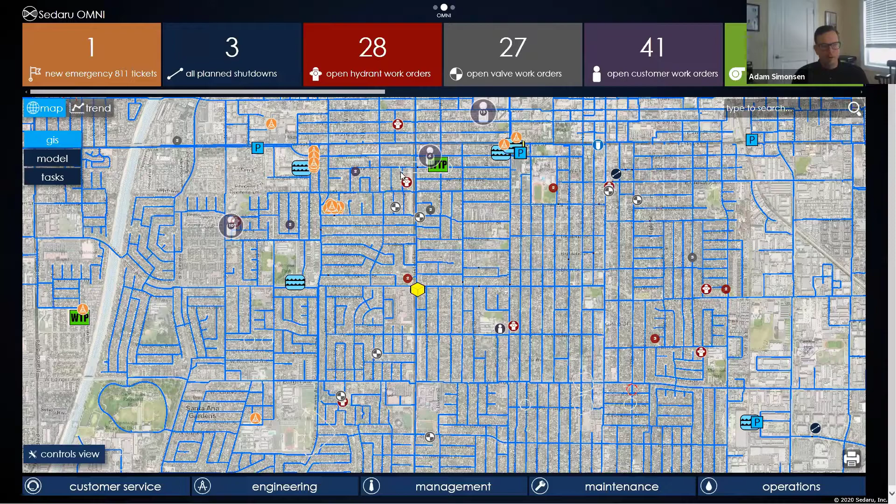If I want to access my water model, I'm just going to swipe over, really, right? And that's now going to put me in a screen with a slightly different interface that you see up here. So those KPIs that we're seeing across the top get replaced by buttons that really help walk you through the hydraulic model.

And here's really the key with what we're doing with Sedaru modeling: we want to make it so that anybody at the water utility can use the hydraulic model to get information out of it. It shouldn't be limited to that one engineer that really knows all the information, or that consultant that knows things. And those folks are going to add a tremendous amount of value in how you use the model and set it up.

But the idea is how can that average person, how can a field user, how can management, how can the average person at the utility dive in and use the model? So quickly, for folks that aren't super familiar with the hydraulic model, I want to kind of explain, well, what the heck is it? How does it differ from what you might be used to?

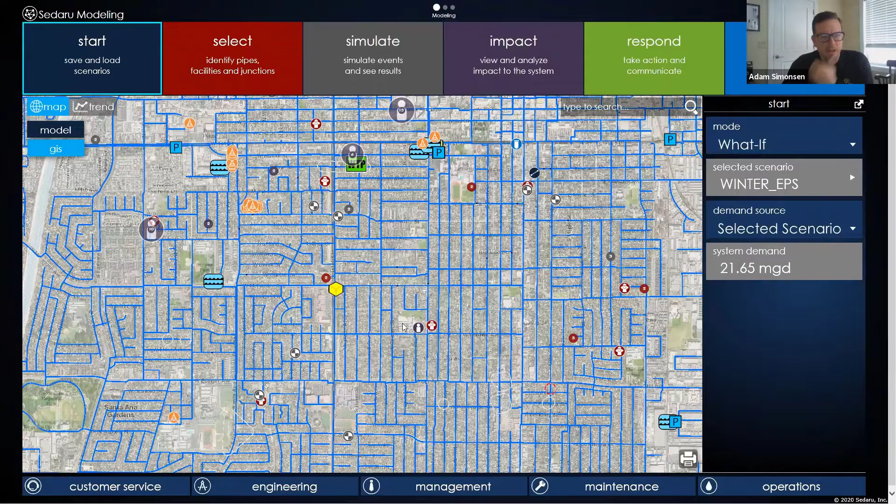So what you're looking at on screen here is the GIS, and I'm going to just zoom in a little bit here, and you're going to see this map update a little bit. And so when you look at your GIS, you've got a collection of pipes, and in this one, valves, and I see hydrants on here. All these M's are individual meter locations. And so you have all of this incredible amount of detail within your GIS, right?

And when we look at the hydraulic model, the model itself is really just another representation of some of these. So I'm going to use these buttons over here. I'm actually going to shut the GIS off, and I'm going to turn the model on. Okay, and so now you see something that looks a little bit different. And in many ways, the hydraulic model does simplify your view of your system.

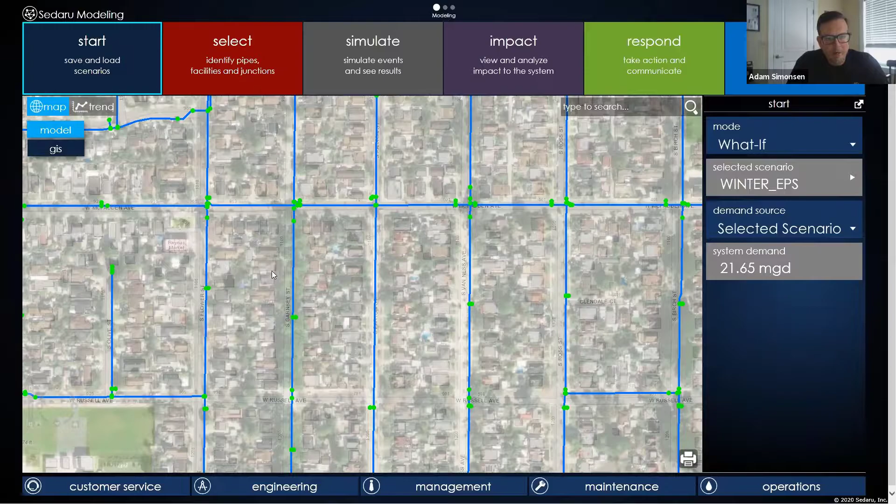So it's fundamentally going to be made up of a couple of different elements. I'm going to focus for the moment on pipes, right? Which everybody should be familiar with, obviously. And so I have a pipe that I've selected here. And you'll notice that that pipe corresponded exactly to a GIS pipe.

And that's really generally the trend with building hydraulic models these days, is that you're going to see a relationship between your pipes in your GIS and your pipes in your model. They should be pretty much one and the same. Some folks will have what's referred to as a skeletonized model. So maybe you're only looking at your transmission system, or you're just looking at large pipes in the system. And while hydraulically that can get you very similar results, the trend has certainly been to use what we call an all pipes model.

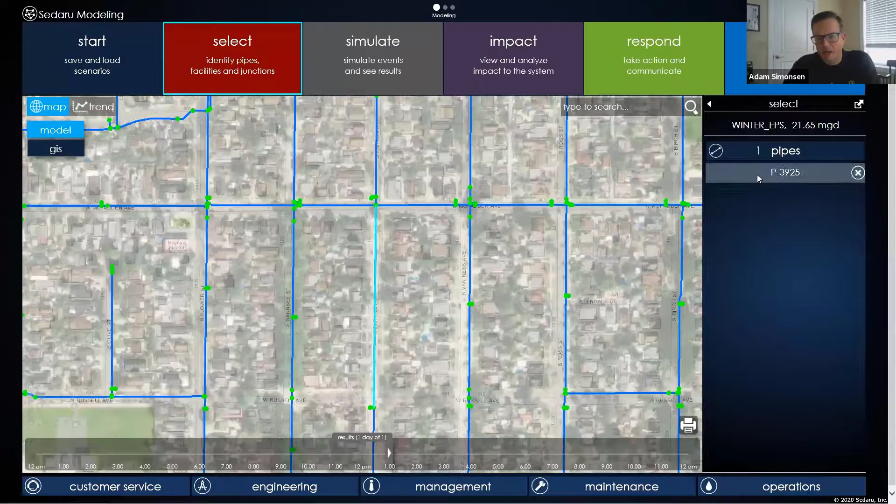So you're bringing all those things in. So I can see the pipe in here. I'll give you some information about it. There's some hydraulic information that we'll get into. There's a model ID. There's nodes, which I'll explain. There's a length. There's sort of all this basic information.

You'll also see this roughness value in here, which is a friction factor essentially that just gives you an idea of what the roughness of the pipe is, how much friction there's going to be of water flowing through that, right? So pipes that are relatively new have a much higher roughness factor. Pipes that are older or tuberculated, or that are going to have much more head loss going through it, generally

have lower roughness factors. Not something that you really need to get into, and when you're just using the model here, it's more of you're going to use it from a calibration perspective, but we're talking about how we're using it, so we're not going to dig into that. But I just want folks to be aware of that when they see those pieces.

And so when I use a hydraulic model, the data that I get out of pipes is I'm going to see these sort of factors as I see up top here: head loss. I'm going to see velocity, right? So 0.64 feet per second here. I'm going to see flow going through here as well, right? And so those are the result information I'm going to get out of pipes.

I'm looking at what's called an extended period simulation here, and so that means I'm looking at information over time. And so here I can see what the flow in this pipe looks like over time. So on a normal day, I can see at any point in time what I would expect for flow through here. You notice these values are negative, so it just indicates which way the water's flowing through the pipe there on a given day. And so I can see that information from pipes pretty easily.

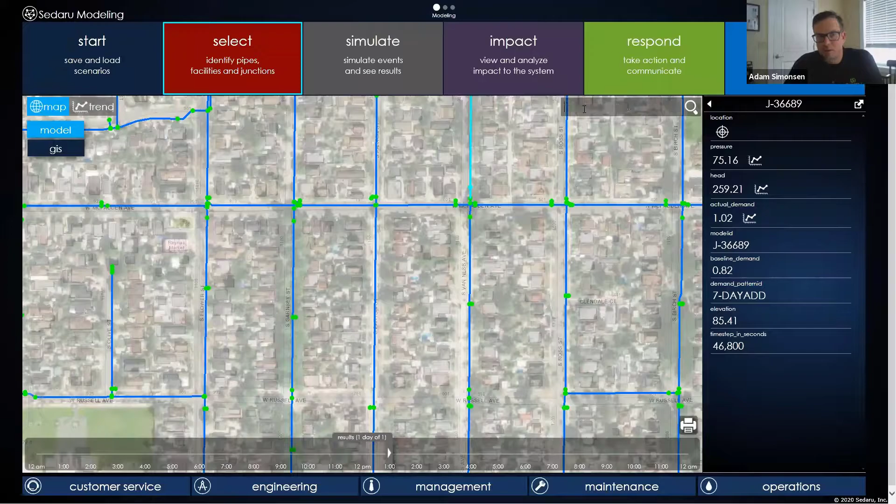typical. And then what you also have within your system is things like tanks and pumps and all of those pieces. I'll use the search feature in here. We'll just type in T, and it should spit back some search results, and that's going to let me see a listing of elements in here. So I'll see in this particular system, I've got 8 different tanks. I can click on one of those, see information about the tank. This little location button's nice because that's going to bring me right to the location of that particular tank.

And so you'll see, I can see that here on the map. And then you see here, I've got a pump station. In this case, there's a well that feeds directly into here as well, and I'll see that here. And so one of the places where you won't typically have exact one-to-one relationships in models is at the actual facility. Sometimes to keep life simpler for everybody, all the individual facility piping might or might not be there, but if it's not there, you're still making a good hydraulic representation of it. So that's the basics in the construction of a model.

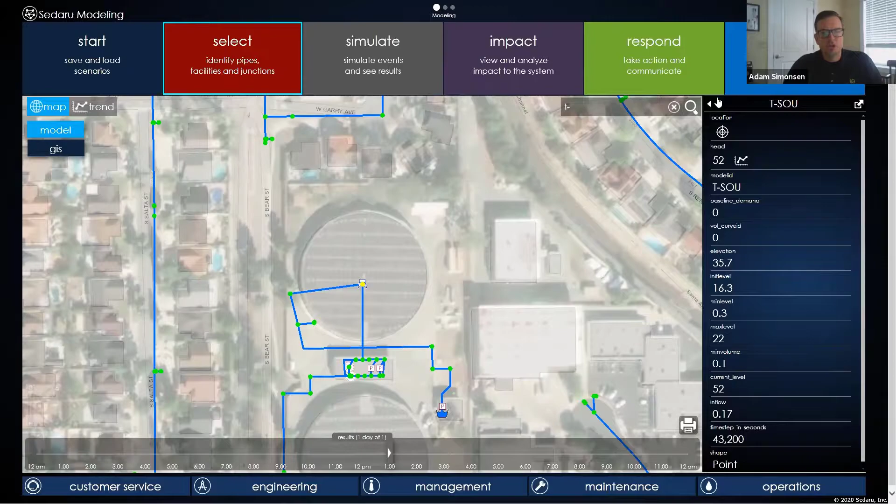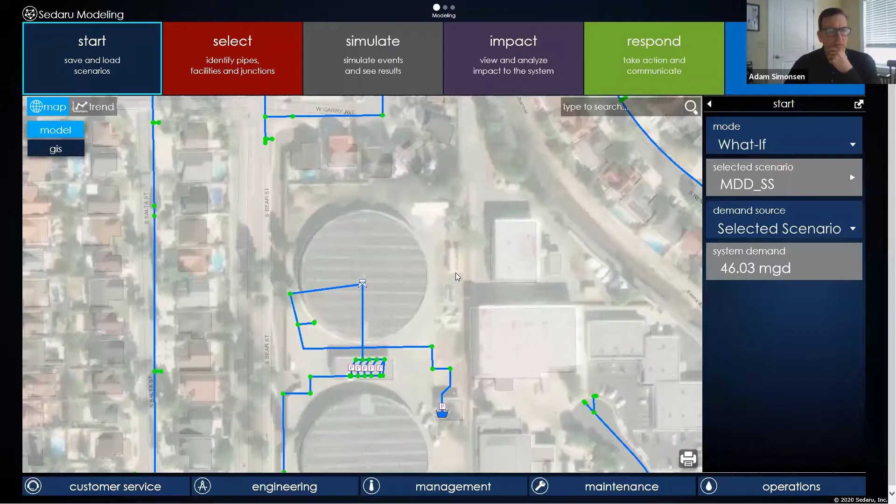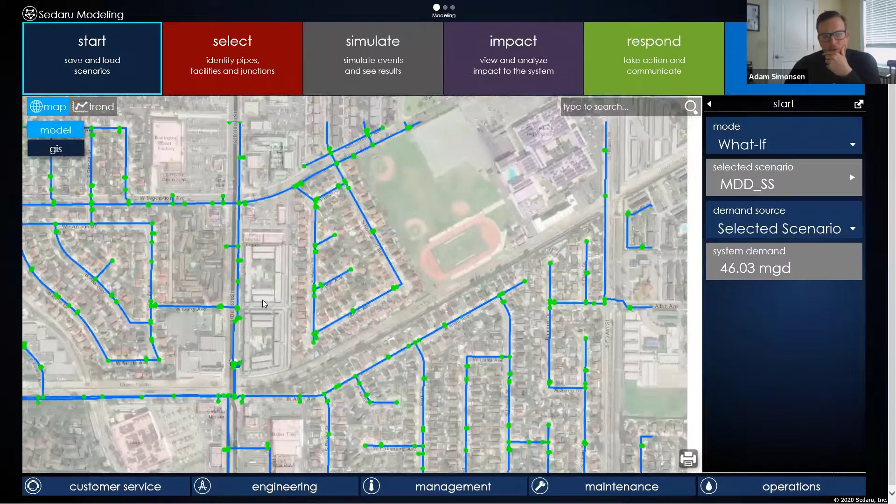Now, what we're talking about here is how do we make this model as usable for the average person at the utility, right? And how do we make it as simple as possible for them? I'm going to start with what's called a steady state simulation here. But typically you're trying to have as many of these pipes and nodes represent the real system as much as possible, so that when somebody looks at a pipe here, it's pretty clear what they're seeing, and they can do that easily. I'm just using my mouse on here. I'm running this from the web browser, but I can pan and zoom and see things here.

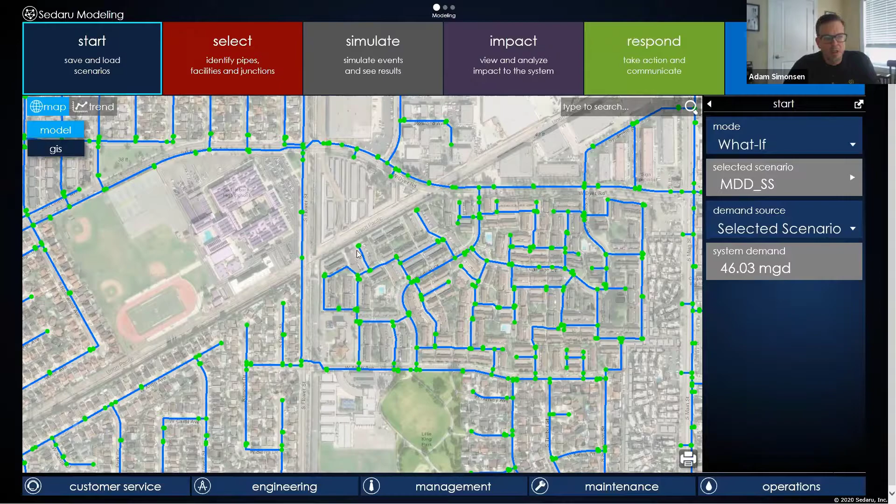But one of the most common ways that we see folks want to use a water model would be to check fire flows, right? So you get a developer request into an area, you want to be able to evaluate what's happening at that particular area. So I'm going to zoom in here on this spot and say, hey, I want to check what's available here for fire flow. So I click on that section. You see it selected some pipes, it selected some junctions for me. I've left this one junction selected, and I'm going to come over here to simulate.

And then I get to say, okay, what do I want to do? In this case, we want to do fire flow. So pretty easy here. I'm just going to click on the button that says, do I need to meet fire flow? Normally at this location, there's no demand, but I want to see what it looks like if I want to get 1,000 GPM out of there. So I'm going to type 1,000, say done, and then hit run simulation. Okay, so this is now running a hydraulic simulation. It's using the EPANET engine, which just about every water model here in the United States uses, and it's going to spit out results that show me what the fire flow here looks like.

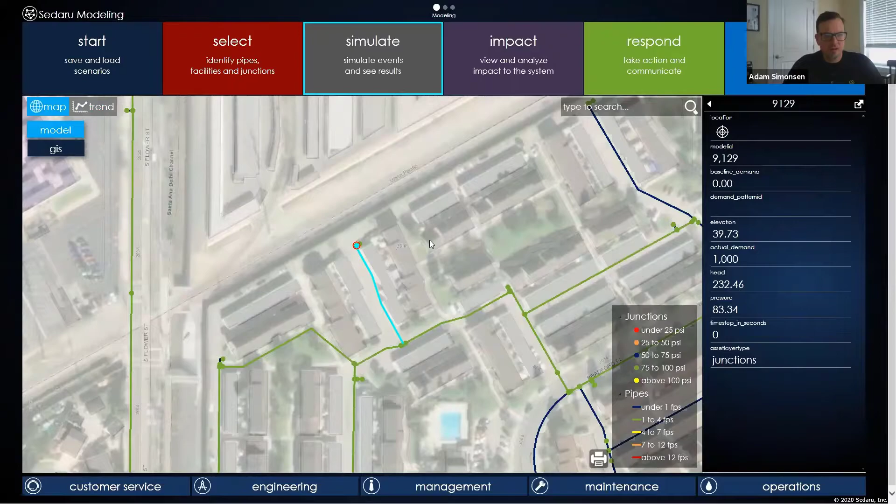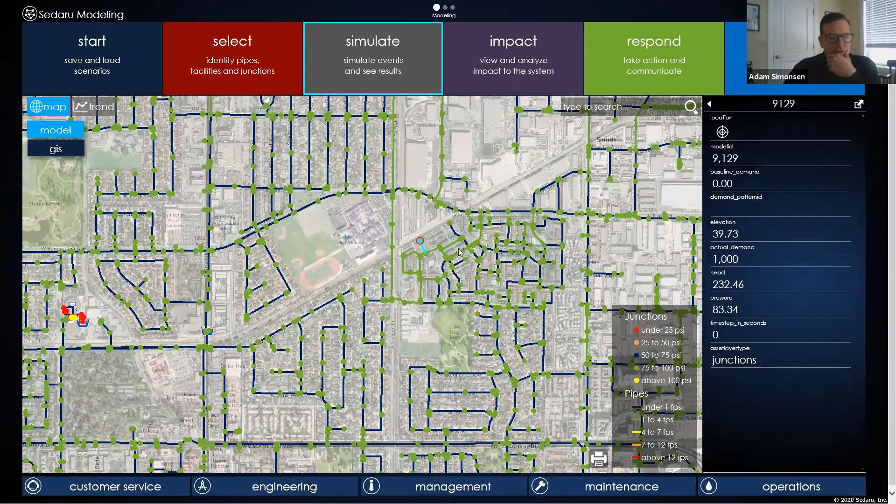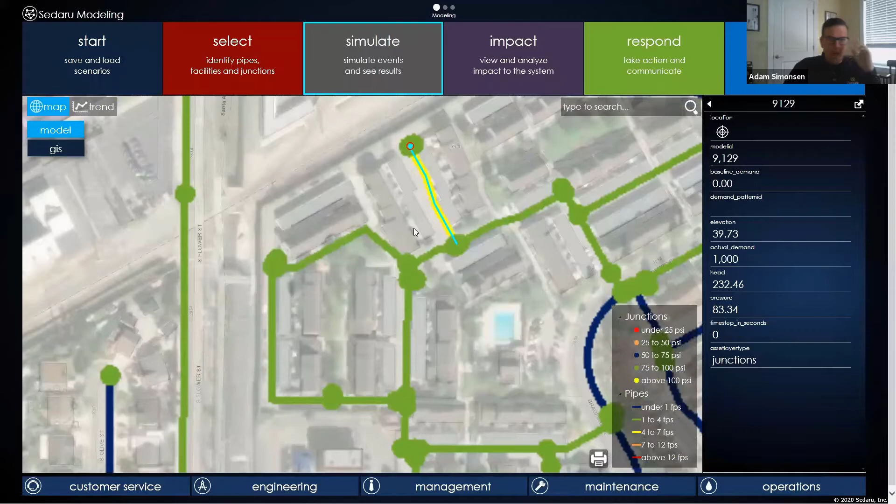I can then swap back over to my map. And now what's cool is, now that I've run this hydraulic simulation, and I'm going to scroll out here a little bit so you can see better, you're going to see the whole map is color-coded. So I can look at the areas here. The junctions are color-coded, so everything that's green is in the 75 to 100 PSI range. And then I can also look at the pipes in here. Everything that's blue is under 1 foot per second. Everything that's green is 1 to 4 feet per second. Let's zoom back in and look at that a little bit here too. And as you would expect, this selected pipe was yellow, right?

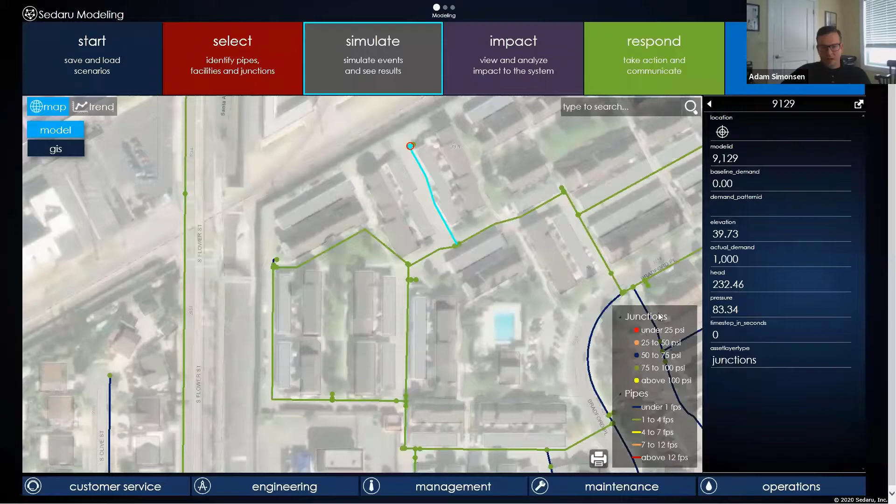So it's going to have a relatively high velocity, obviously, because I'm trying to pull that fire flow. The pipes around it are going to have 1 to 4 feet per second velocities, and then in and around some of these other areas, we're going to be back under 1 foot per second. And so I can see that

information pretty quickly. I also can come over here to this impact tile here. And so the impact tile is going to show me other areas in the system that are going to be dramatically impacted by it. So I see my top 10 changes for pressure in the system in the area. And I can essentially see that nowhere in my system am I going to have dramatic decreases in pressure as a result of this.

And I like the way that this impact is presented, because one of the reservations sometimes that you'll hear from folks around letting non-engineers run a hydraulic model is that, well, people don't really know what they're doing with the results. And what we've done here with the Sedaru modeling tool is really kind of lock things down so that what you're running for simulations and your what-if scenarios are fairly contained. And then you're able to see the universe of results there as well, and be able to analyze those things pretty quickly.

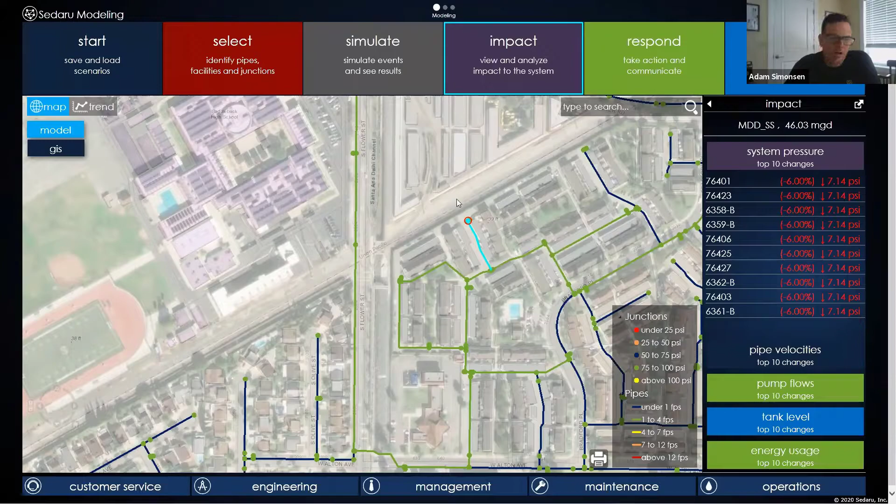And so it makes it kind of quick to make some assessments from there. If I wanted to then look at this a little bit differently too. So we know coming in here that it was going to be pretty easy to get the fire flow that we needed. But now let's say, what happens if we have to do a shutdown over here, right? We've got a large industrial customer here, and we know we've got to do a shutdown. We've got to take part of this main out of service, and I want to make sure that I can still provide fire flow there and be able to do that easily.

So I'm going to select this pipe here. You see it highlighted in blue now. I'm going to come back over here to simulate. And you see it's still saying, hey, I want to do 1,000 GPM here. But now I can expand this button that says more changes. And now it asks me, what do I want to do? Do I want to close the pipe? Do I want to make a pipe bigger or smaller? Or do I want to make a roughness change here, right? So like if I was going to rehab this pipe, for example.

But let's just go ahead and say we want to close it, right? We got to take this out of service. So I can come here, really simple again. I'm going to say I want to close the pipe. And then it asks me, do I want to do anything more? Nope, I just want to say done. And so now I can go ahead and run the simulation. And so now you see I've got two things listed here. I've got the pipe being closed, and I've got the 1,000 GPM fire flow going in there. So we'll give that a second to run, and then we'll take a look at the results and see what those pieces look like.

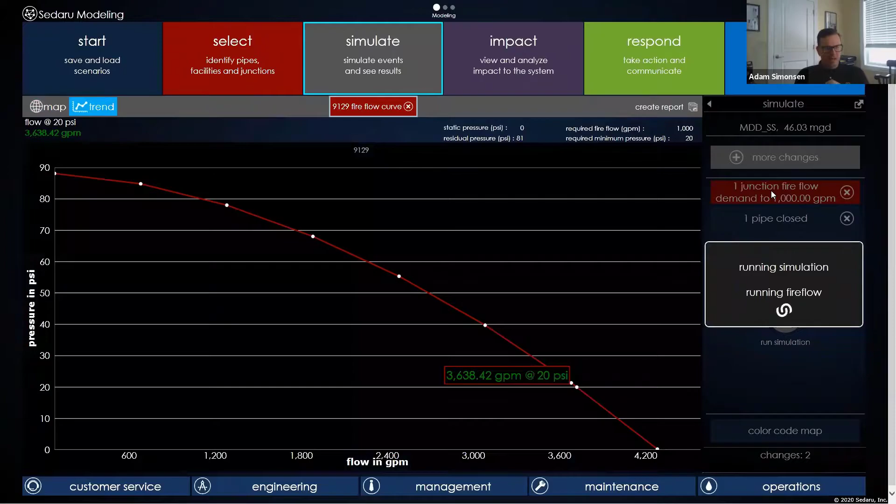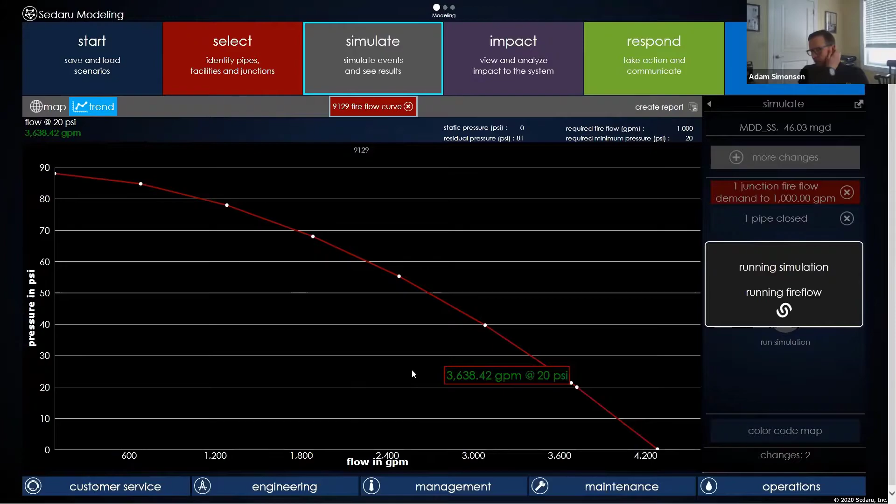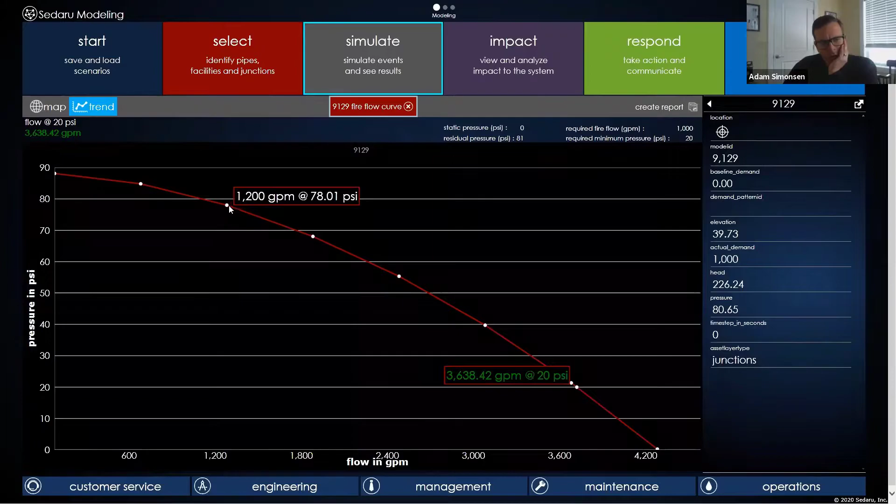So now we see some results that look a little bit different, right? Before, at 20 psi, we could get upwards of 4,000, or I think 4,800 GPM out of there. Now we're looking at 3,000, 3,600 GPM out of there. And so some of these pieces start looking quite a bit different. So I'm dropped down here, and I can evaluate this and see what the effect is of my operation. So I can still get fire flow in there, which is good, obviously.

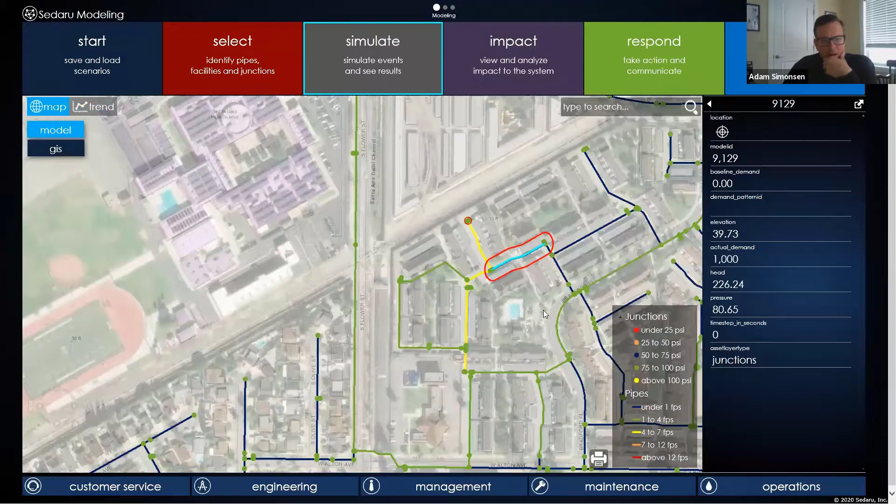But then we can come back and look at the hydraulic results in here. And so now you see with this pipe out of service, we can take a look at the color coding here. Again, we take a look at our velocities and we realize, okay, we're going to see significant velocities through this section here if we need to get that significant fire flow through there.

So being able to produce those kind of results really quickly, and you think about what a lot of your workflows would look like to how you might want to get an answer to that question, right? Are you out there wanting to run fire flow tests, all of these sort of significant things that now you can put in the hands of somebody that can run that from their laptop, wherever they're located at the moment, and do that kind of quick assessment of the system. And so I can then go in and see that.

And then if I want to actually share this information with other folks pretty easily, I can do that as well. So I can come over here and hit the share task, and then I can say, all right, I want to generate, what's the summary of this particular event? And so I can fill out what I want to title these things, and then put that information in there.

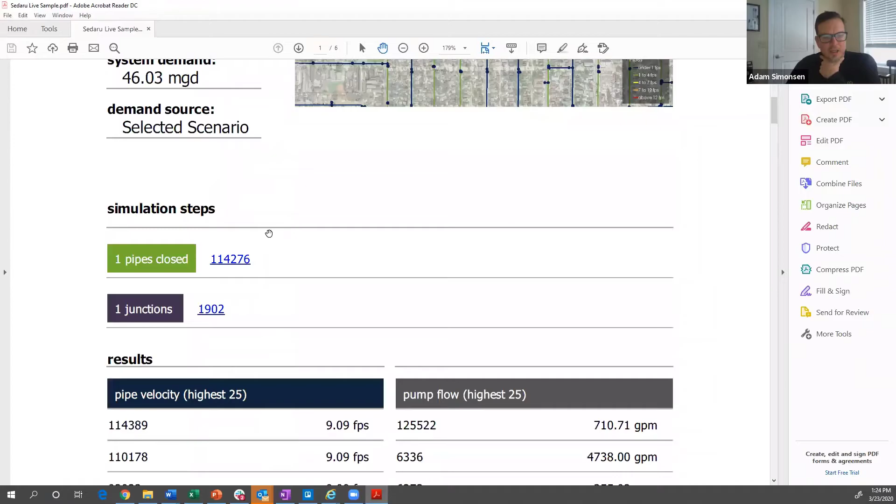And so now I can see an example of what it might look like. This was another report, but you get the idea. I can see the scenario that I was running, what the overall demand was, changes that were put in here, and then a summary of what's going on at the other spots in my system. So we tried to really easily make it so that you can see and drill into some of those things.

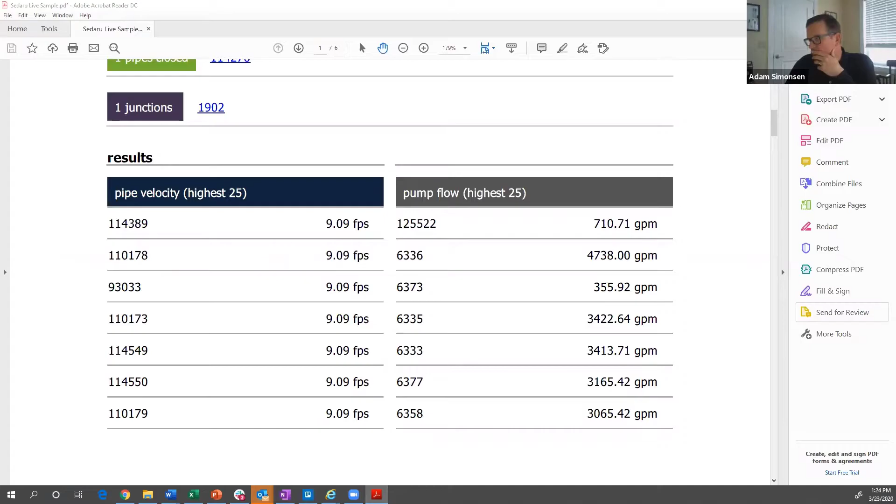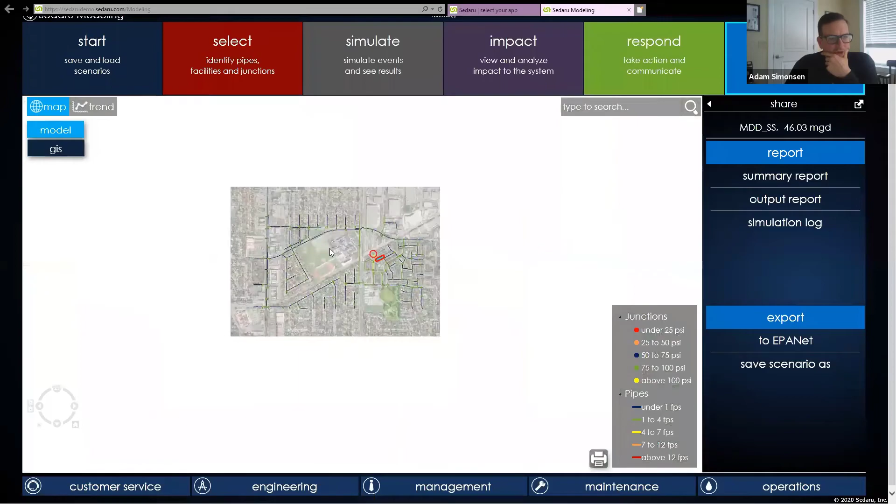So let me hit a couple questions that folks have. One was around modeling scenarios and what can be used. Let me go back to the start screen. Here on the start screen you've got a choice of different scenarios. In this case I've got two set up. There's one that says MDD_SS, which stands for max day demand. Often for a lot of your design considerations, you're going to be using that max day simulation. And then we've also got the EPS, the extended period simulation, set up in there as well.

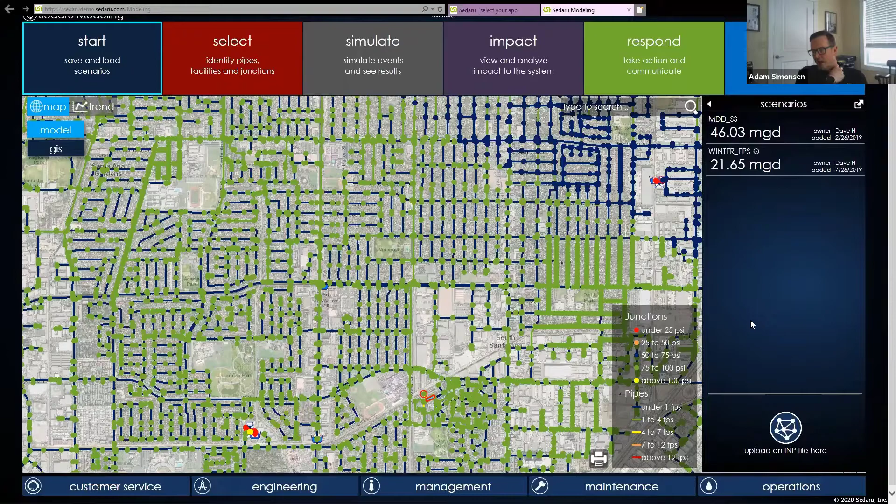So you can take any scenario you want out of your existing water model. Whether you're running InfoWater, or WaterGEMS, or even just a vanilla EPANET simulation, you can export those scenarios and load them right into Sedaru Modeling. Here where it says upload an INP, I can just click on that and have it bring in an uploaded model.

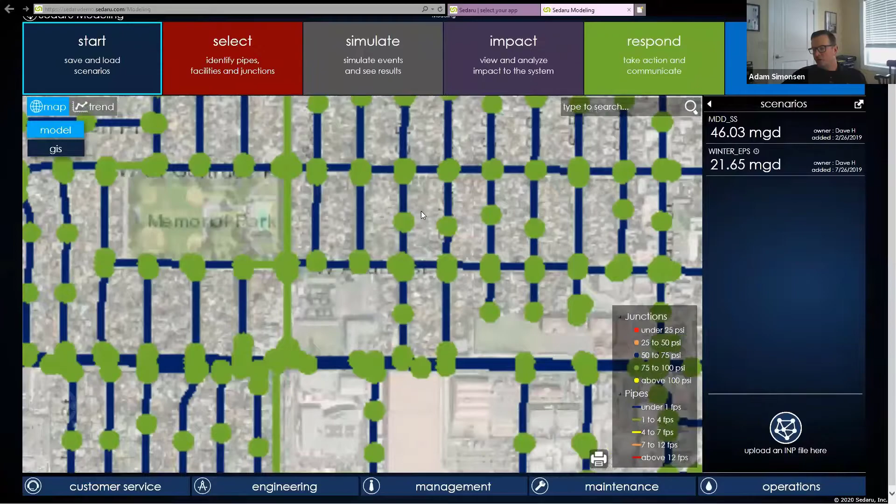Let's see, another question. Somebody asked about flow arrows. You can't actually view the flow arrows in here at the moment, but that is on the to-do list for the Sedaru Modeling application, to add a few more graphical features so I can see exactly the flow direction. When I go into any individual pipe, though, I can view results and see the amount of flow and some of those pieces right from there.

And I'm going to switch back into the extended period simulation. Let's look at that a second. So I'm going to switch scenarios here.

I'm going to go back into this winter EPS scenario, and you see that's loaded back up for me here. And now I want to just run a simulation that says, hey, I want to see what happens if our demands were, instead of 20 MGD daily demands, let's say 28. Let's say we have more than we were typically expecting, and I want to see how that's going to make things behave. And so I can then go ahead and run that simulation,

and it's going to produce some new results for me. And one of the things where we see folks using these models is when you think about how do you train some of your new staff, right? Across the board at the utility, you might be hiring new staff that don't have a lot of familiarity with water systems in general, and you want to be able to explain basic hydraulics to them and how different things behave. I can run those kind of simulations right from here.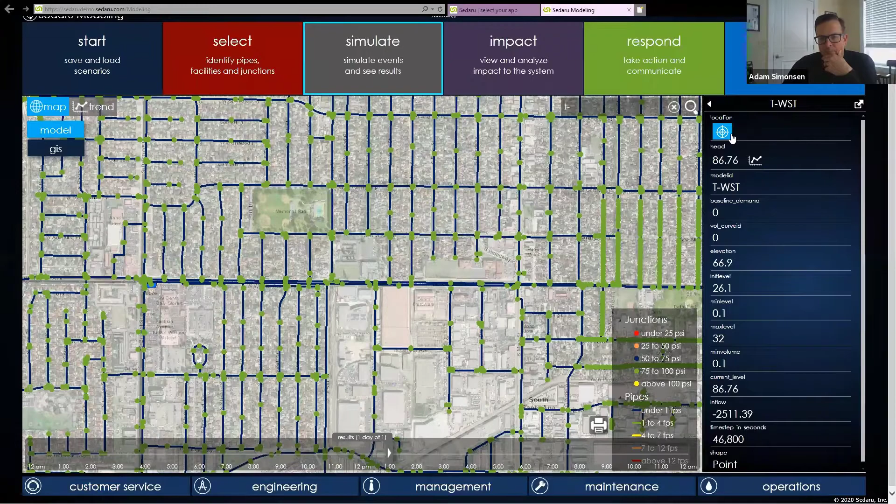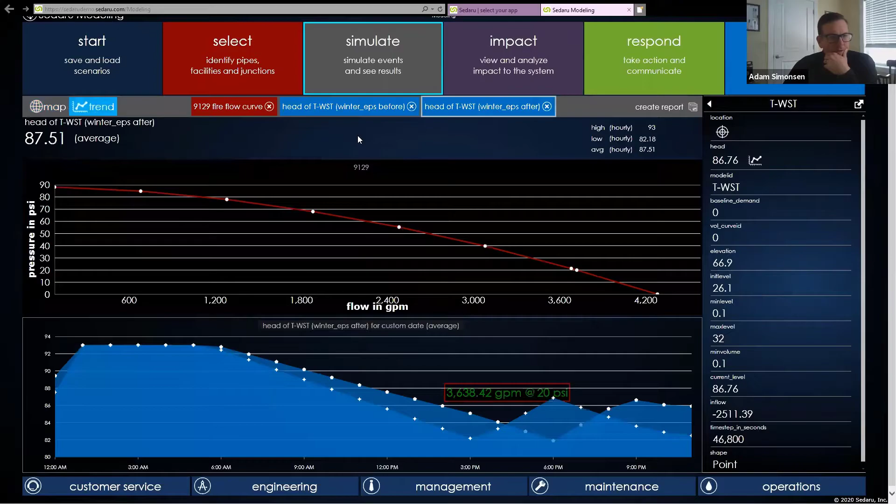Let me go back and search for tanks again, because we're going to look and see what one of the tanks here looks like as a result of that global simulation change that we just made. Let's go out to this one on the west, and I'll just zoom into it too, so you can see the location of what we're talking about here. And now I can see what the tank level there is going to look like. Let me get rid of this curve here so that it looks a little bit better.

So now what's neat here is in these simulations, I can look at what the before and after look like. The before, I can see what a normal day would look like. But then if I have higher demands, what I'm going to see is what you would expect, right? That tank's going to drain faster than what we typically would expect. There's controls built in here that say, when this tank level gets down to this particular level, it's going to turn on a pump. And so I can essentially see how the operations of my system would start changing as a result of that simulation. So pretty neat stuff that I can do here on that EPS simulation.

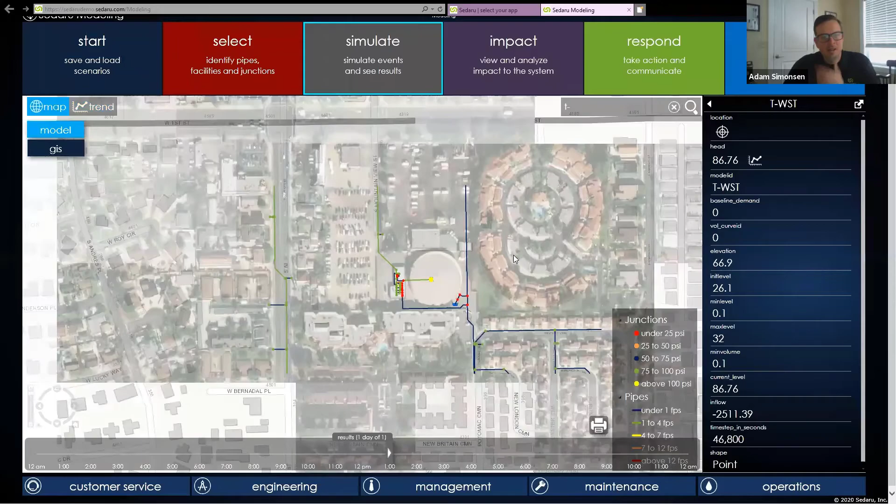I can do a similar sort of piece here, and this happens inevitably with places, right? Let's say you've got a large leak somewhere, and you're trying to figure out where it is or where it's coming from. I could pick a spot in my system and say, let's go over here. We'll pick one of these nodes, and I'm going to come over here to simulate, and I'm going to get rid of my demand change here, but let's just say that I want to make a demand change at that junction.

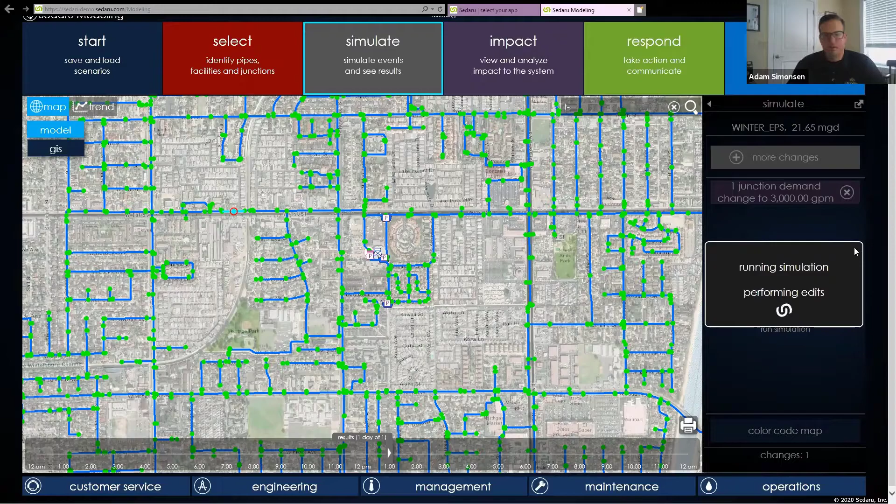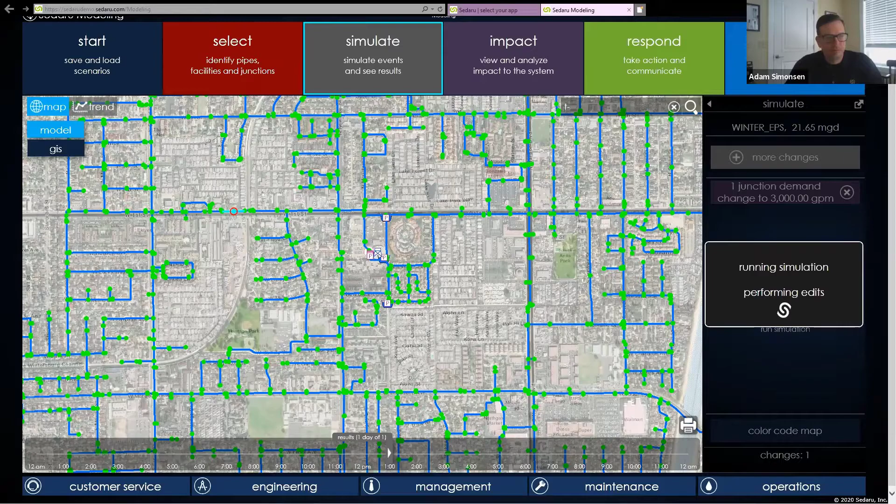And let's say I've got a really large leak somewhere and I can't find it, but I want to see if I have 3,000 GPM coming out of this location, what's that going to do to my system? Am I going to be able to manage that kind of leak? Am I going to be worried about drawing down a tank or dealing with any of those kinds of pieces? And so we'll let this update and run here and take a look at the results from it.

All right. So we got some results in here from that. Obviously, you see the velocity updated in here. But what we're really more interested in is what this tank is going to look like. So I just clicked on that tank, and now I'm going to pull up the graph of this tank again. And again, I get the same kind of before and after. That tank's obviously going to get drawn down much faster. Normally we'd be looking at that tank drawing down till 6 o'clock, but by noon it would be down at its low level.

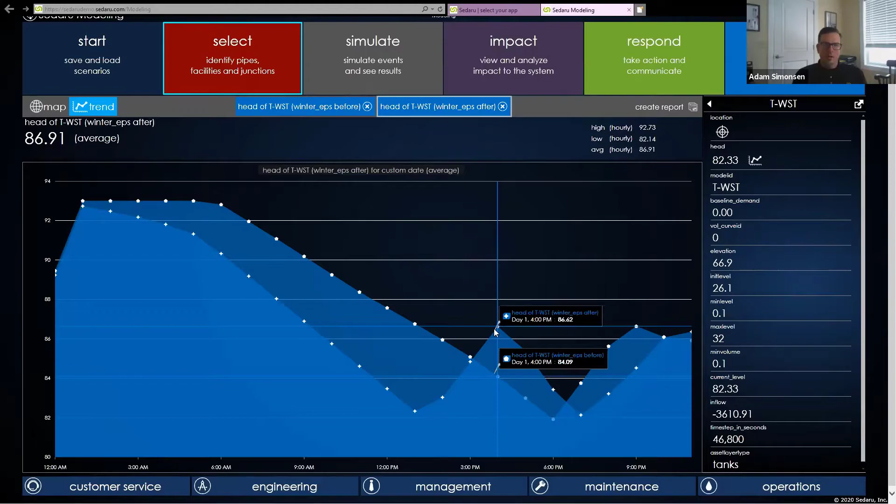We'd be turning those pumps on, and we can kind of see how that cycle here would continue to repeat itself over the simulation. So even with that leak, it looks like you'd be able to do that, but you'd obviously be running those pumps, or in this case, I think it's a well that feeds in there. You'd be running that more often, right? But you can, again, sort of quickly make that hydraulic analysis here.

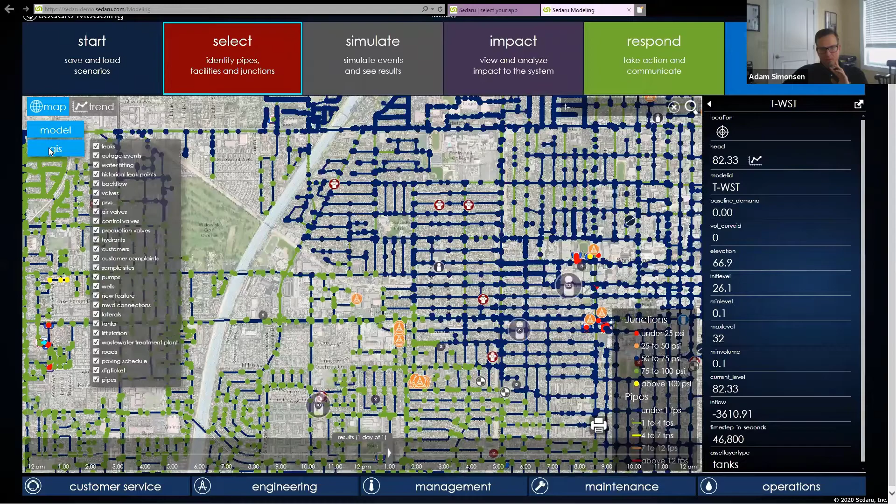And then one of the other neat things that you can do now when I'm running all of this within Sedaru Modeling is, if I go in here and just show a little bit more of the system, I can turn my GIS on as well. So now right from my water model, I've got the ability to come in here and say, well, what are we working on here in the system? Do I have other work orders that are going on? I've got other pieces going in here. I've got folks working on, I've got other sort of complaints coming in here. And so I can see all that information together in one place.

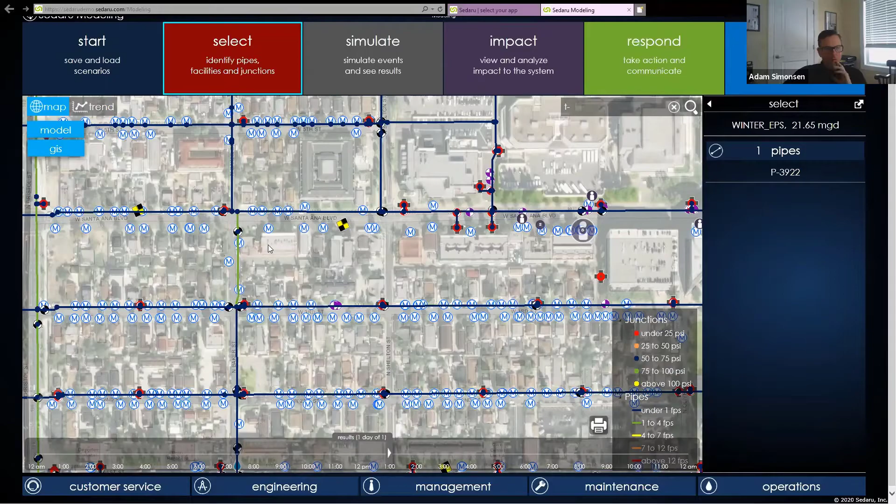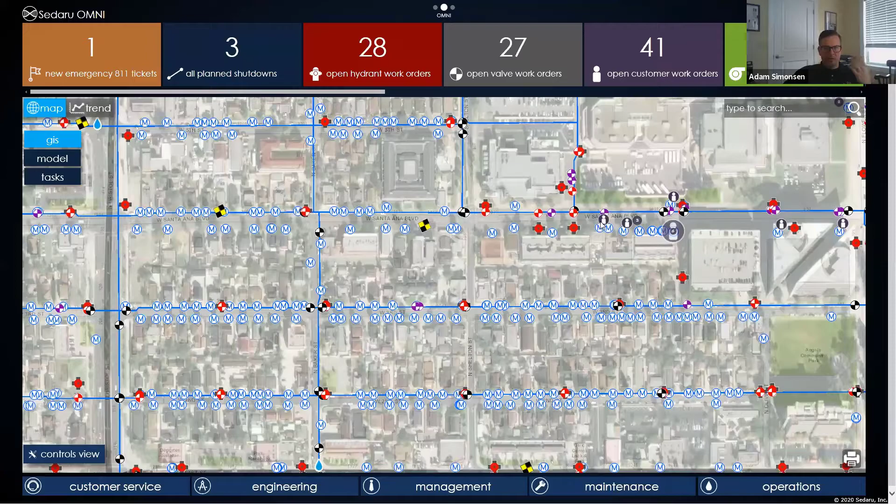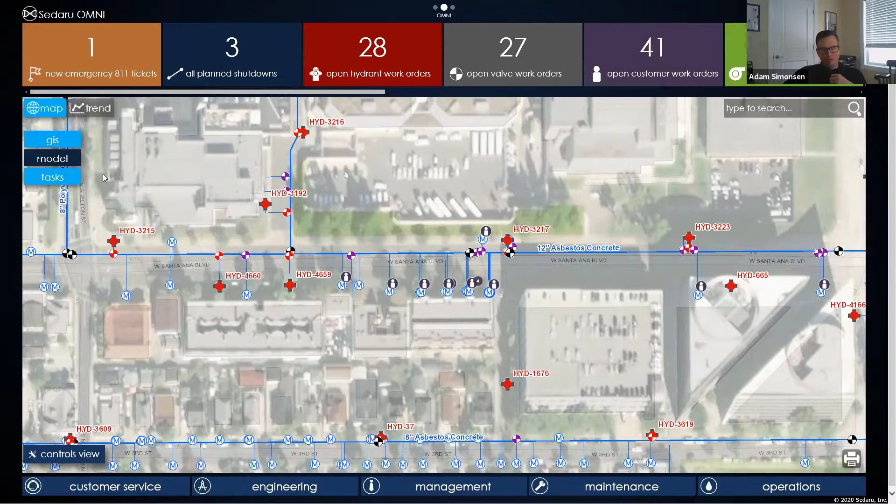And then if I want to really drill into it, I just swipe back into Omni, and it's going to zoom me right back into that same place. So I can come in here and say, okay, we were doing some customer work there not too long ago. I can turn on my tasks and I can look for, do I have any open work orders in that area? Do I have anything I need to worry about there? And it looks like in that particular spot, there's not one specific item I need to worry about, but I can come in and investigate everything that's going on.

And so those kind of things really help make sure that the model itself doesn't just become siloed and is not being used by as much of the staff as you would like.